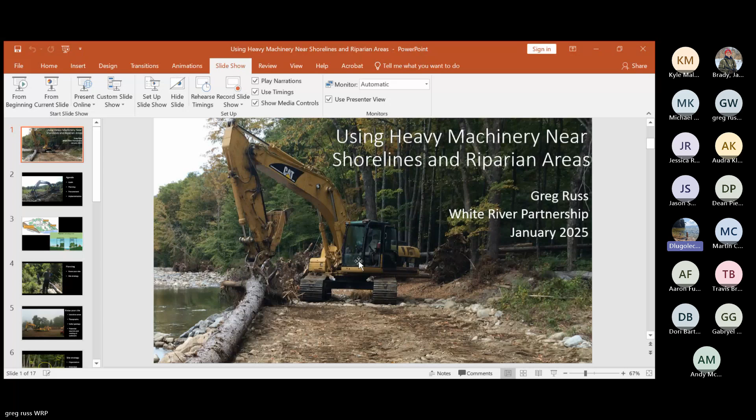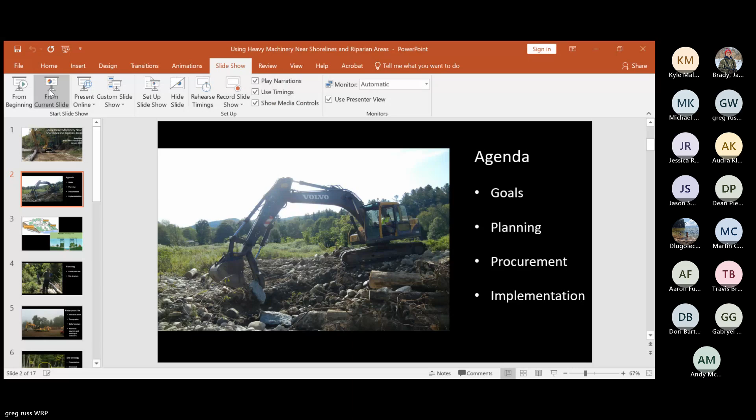Greg, can I interrupt you for 1 second? Absolutely, are you advancing your slides? Yes. Okay, we have not seen them advance. Oh golly, okay. Interesting, yeah, I'm advancing slides. Maybe stop sharing and try sharing again. Just give it a, I just don't know. These things, the troubleshooting on them is usually just trying again, I feel like. Okay. Let's see, I'm gonna try something different. Can you see that? Nothing yet. Yeah, okay, I'm gonna try something different. There's share screen and there's share window, I think sometimes share window works better. I don't know which one you're trying. I was doing share window, and then sharing, so you should see that. Oh, here we go, it's coming. All right, so I see the starter slide there. Oh, it's moving, okay, let's see if it moves now. I haven't, it's still on that second slide. How about now? Yes, okay, so I'll just do it this way.

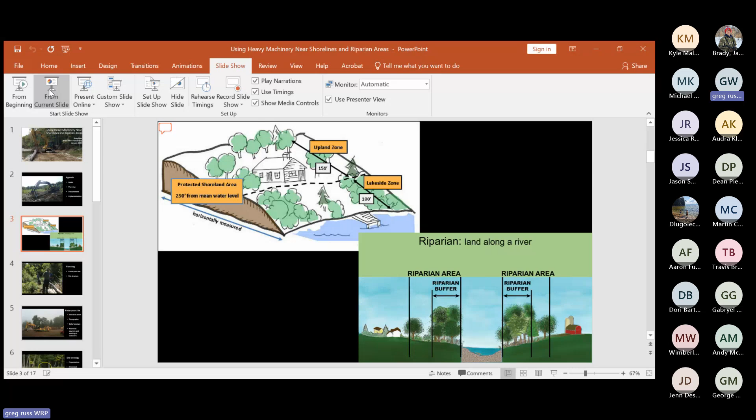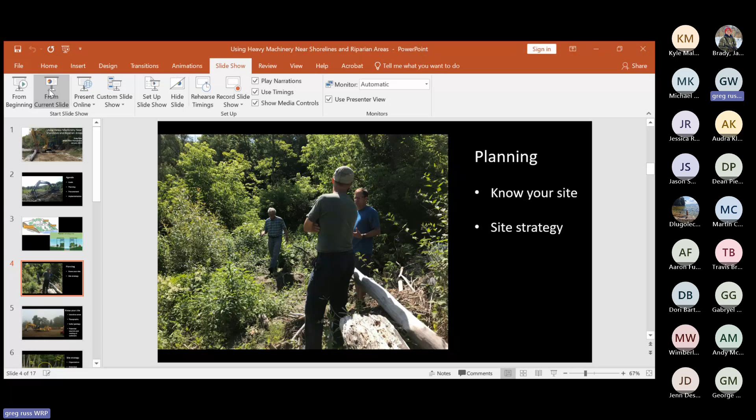This is just back to talking about riparian and shoreland and how these are sensitive areas. Planning or design work, whatever you want to call it, I think planning is the most important BMP there is with regards to any project, but especially with using heavy equipment. In this picture we have a contractor, a regulator, and an engineer. That planning process is going to involve everyone: the landowner, the engineer designer, the regulators, the contractor, and we'll bring those in at some point. That planning process is really important.

I think it's very important to know your site, and what that means is everyone involved in the process should know the site. You can see in this photo a lot of equipment there. This was from a project that took 5 weeks. Every morning at 6:30 we would all meet and talk about what went right the day before and what we need to do moving forward and where we're working. We're all aware of where those sensitive areas are, and we know the work we're doing could contribute to sedimentation issues, so we're trying to mitigate that as a team. We all know our site, and then having a strategy.

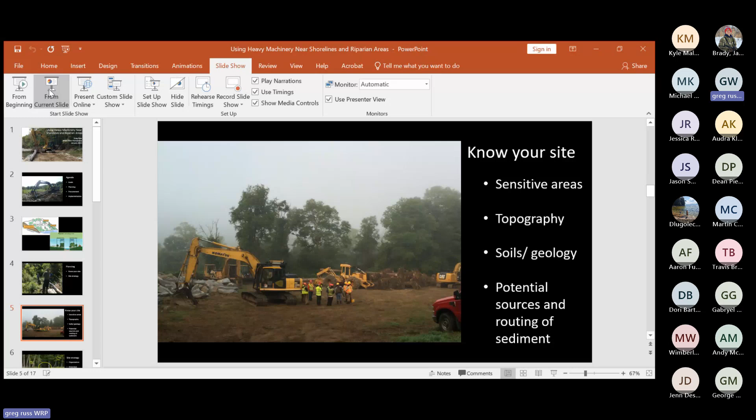When you're dealing with heavy equipment, you need to be organized. You need to have a plan of how you're going to use that equipment on the project site, and you want to have an enter and exit strategy. That's not as simple as just deciding where to enter and exit. I think an exit strategy with heavy equipment is almost three-dimensional. It's knowing not just where you're going to enter and exit, but how you're going to do it, and do it in the right way.

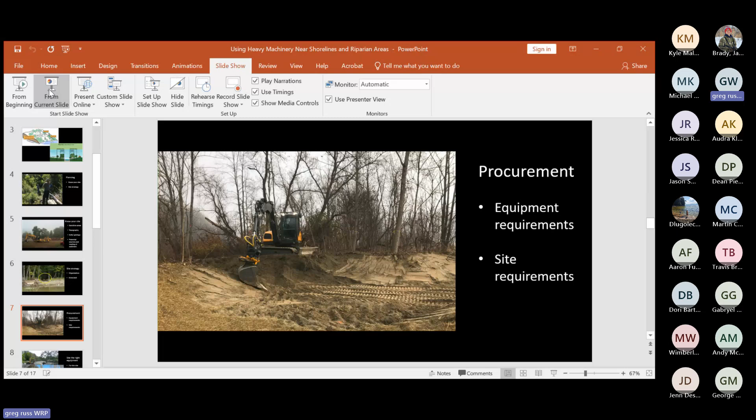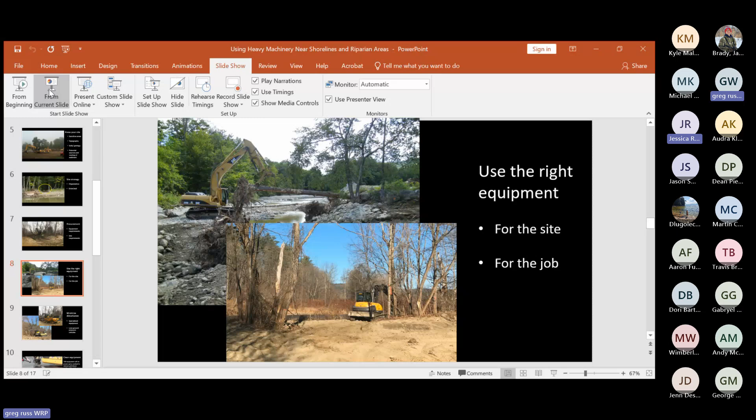While we didn't require a certain size machine for that job, the contractor actually suggested, when we put it to bid - the one we ended up hiring - a certain type of equipment that would be able to go in and around these existing trees and preserve them while causing the least amount of disturbance. That was a way the contractor could say, hey, this is the right equipment for this type of job. That's something you can do to find the best equipment for the job and for the site.

And then we want to minimize our disturbance. You can utilize specialized equipment, including low ground pressure vehicles. We're all pretty familiar with tri-axle dump trucks - we see them on the highway all the time. They haul a lot, but they're made for road work. When we're in these sensitive areas, there's specialized equipment that limits the compaction on the ground.

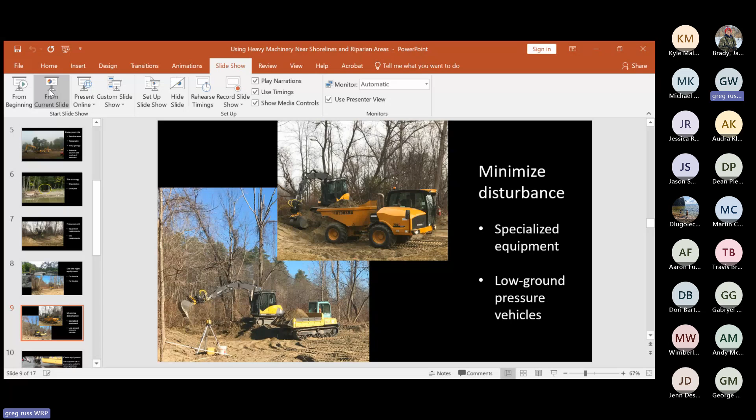It's a game changer, and it definitely does help limit the disturbance and allows the work to get done. One thing we require on all our projects is that equipment is cleaned prior to mobilization. This is actually the language in our bid documents: all equipment will be power spray washed to remove petroleum residue, dirt, and noxious weed seeds, and we do that.

So if you have a machine that's covered in grease, and you're bringing it into a sensitive area, it's inevitably going to brush up against vegetation, and basically you're leaving that grease there. So we want to try to minimize that. Same with noxious weeds or invasive species - if we can limit the spread of those, it goes a long way.

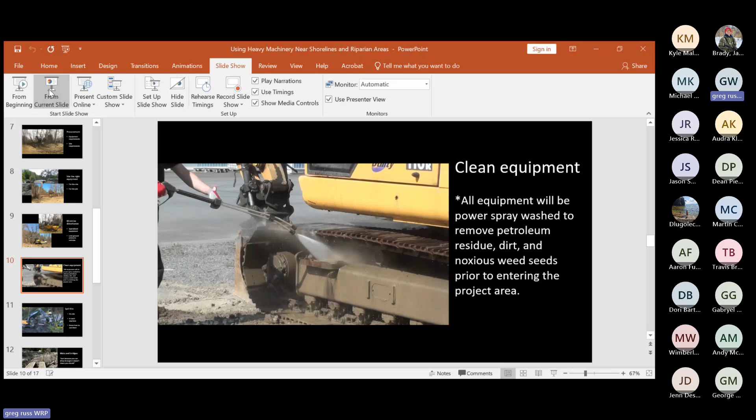We don't require it, but I do know of contractors that have switched out their hydraulic fluid with biodegradable vegetable oil. It's not a cheap endeavor, but some people have done it, and that goes a long way as well. We do weigh that when we do our bidding.

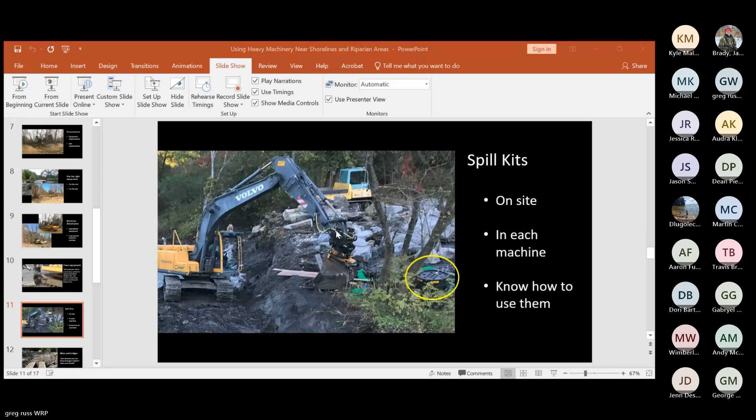We came about using mats because a contractor brought them to our attention and said, 'Hey, this is how I want to get to where we need to work, and this helps protect the area, I really want to use this - what do you think?' And we said, 'That's brilliant.' So I'm a huge fan of those now.

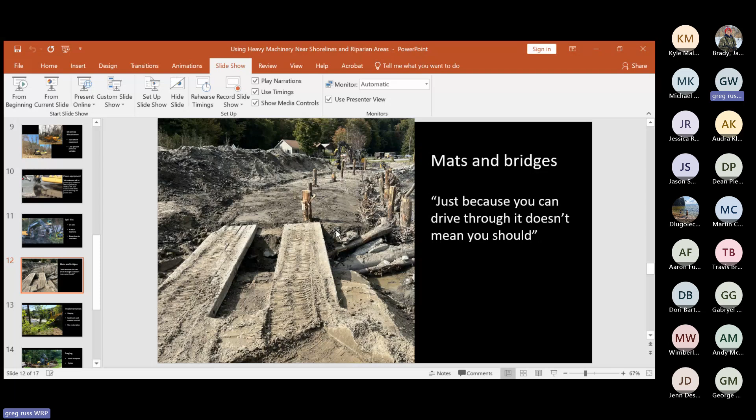With implementation, this gets into staging, sediment erosion control, and ultimately site restoration. For staging, I'm a big fan of small footprints, and a lot of that comes down to optics. If you're working with big yellow machines by water bodies, people take notice, and rightly so. So having an organized approach, a small footprint, and knowing how you're going to enter and exit, goes a long way with the optics. During implementation, having thought out how you're going to stage is really, really important.

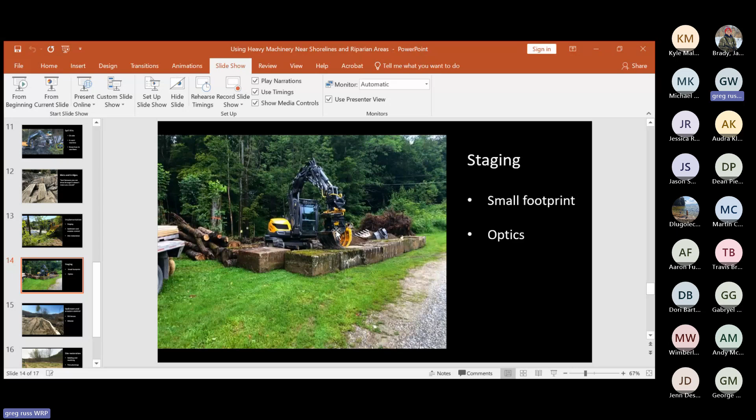Sediment erosion control - I know this is a requirement with permits, using silt fences correctly. I'm a big fan of Siltsoxx. They're easy to use, and the ones we typically use are biodegradable, so you don't have to remove them - you can leave them and they'll just break down after 12 months. They're made with cotton and wood chips, and they do a really good job. That's what we use.

But it's really important to limit the amount of sedimentation getting into a water body. This goes back to the planning stage - knowing where those sources might be, then when you have heavy equipment on a site, how that's going to change it, and then how the site's going to react to the work that's been done, and being mindful of those things.

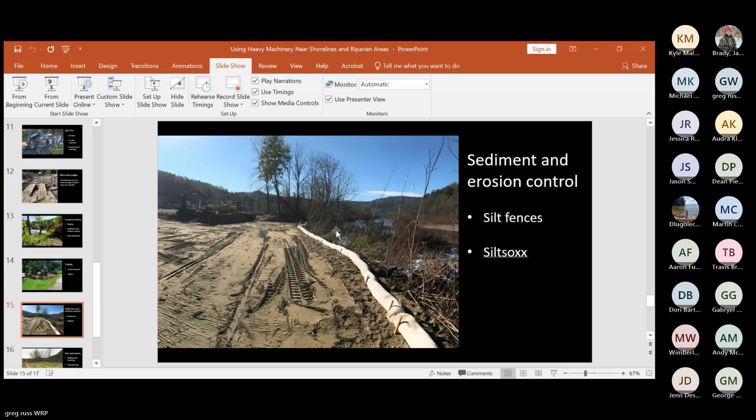Restoration - I'm a big fan of that. Once you've done the work for the project, how do you leave the site? Seeding, mulching. We've gone so far on some projects to limit the spread of invasives by requiring the mulching be done with straw as opposed to mulch hay. And then I'm a big fan of tree plantings.

So, very quickly - maybe there are questions. Feel free to ask.

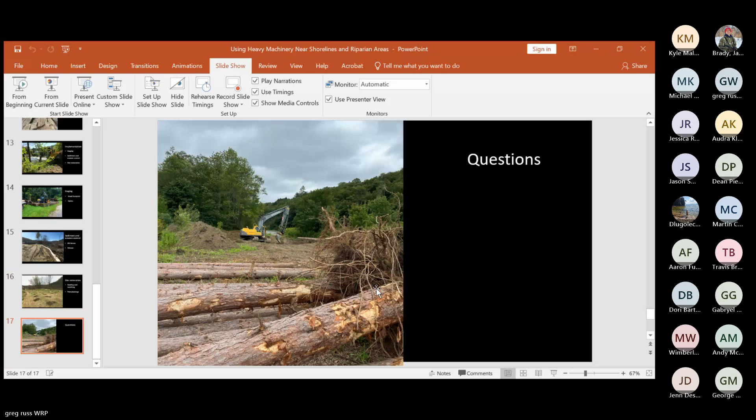Don't know if that worked. Okay, any questions? No?

I feel like I flew through that, but I was just trying to give folks a heavy equipment 101 rundown of things to think about.

No questions? I got one for you here, Greg. This is Andy with Valco. Great overview, kind of a high level, covered all the high points. Just curious if you had any experience you wouldn't mind sharing with the group about equipment specifications. You mentioned the tracked equipment.

In our experience, the tracked dump trucks are really helpful for the right-of-way work we do. Another example is silt fence installation, where usually they use the biggest excavator because that's what they have, not the right tool for the job. But if you have any other experience you found noteworthy, I'd love to hear it.

Yeah, so in the line of work that we do, we're not on lakes and ponds, but we're in rivers or along rivers, and a lot of times you're manipulating either wood or rocks. It's surprising to me how many operators or construction outfits have machinery that doesn't have a thumb, something as simple as a thumb. So we recognized that pretty early.